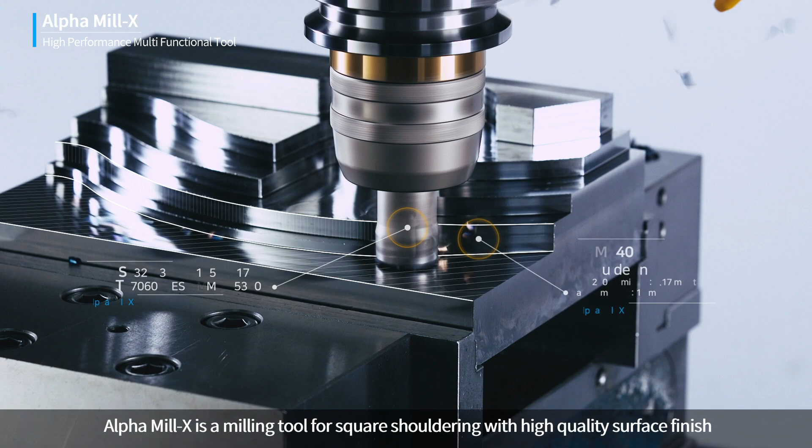A milling tool with high rake cutting edge for square shouldering, Alpha Mill X. Alpha Mill X is a milling tool for square shouldering with high quality surface finish, applying a high rake cutting edge and high rigidity design.

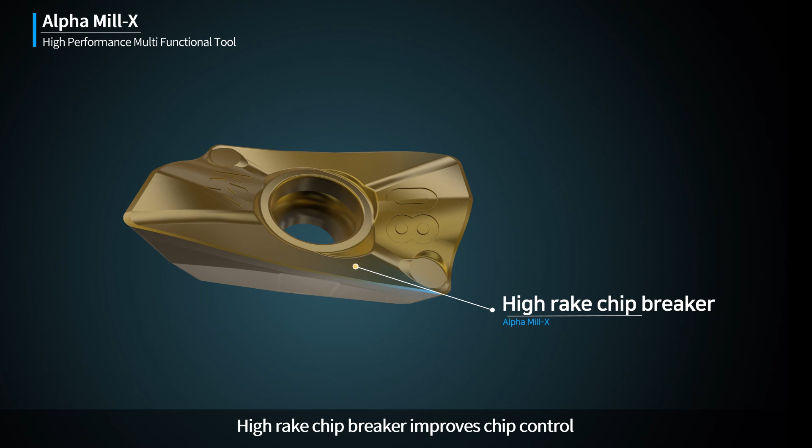High rake chip breaker improves chip control, and high helix cutting edge decreases cutting resistance dramatically.

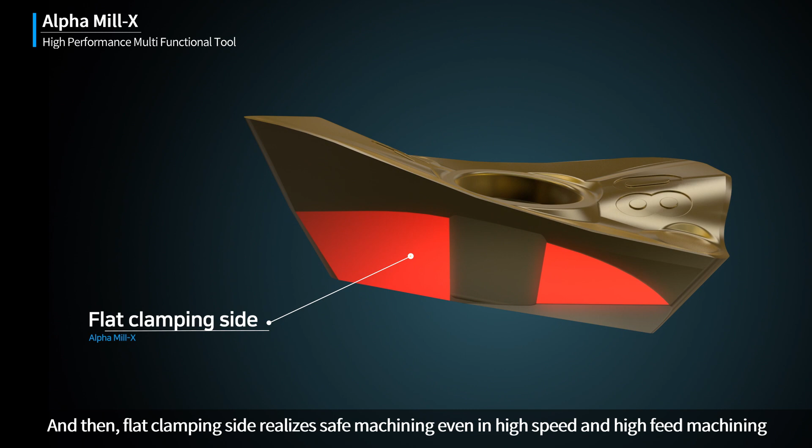Flat clamping side realizes safe machining even in high speed and high feed machining. Wide minor cutting edge is optimized for high surface finish machining.

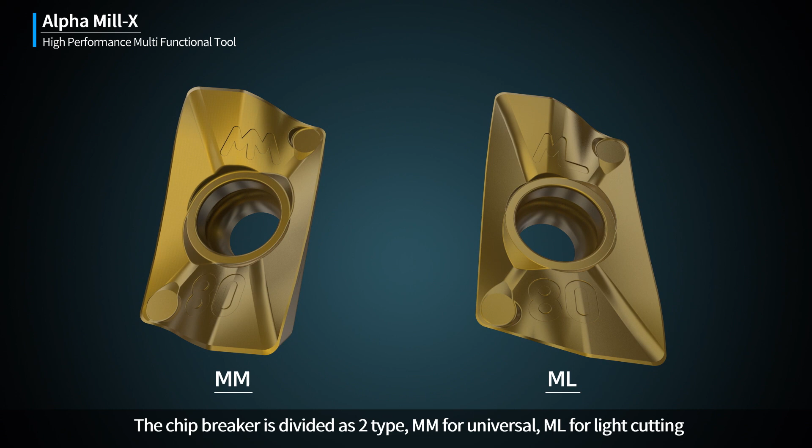The chip breaker is divided into two types: MM for universal, ML for light cutting. In addition, various nose radiuses meet customers' different needs.

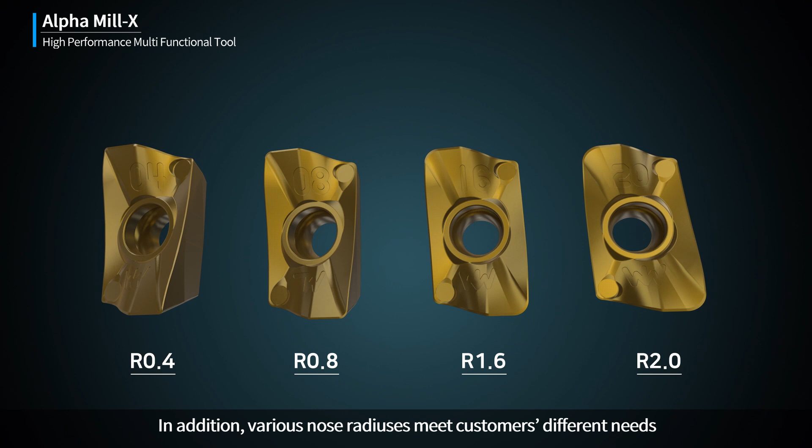Alpha Mill X, applying high rake cutting edge, decreases cutting load, and makes it possible to realize high-quality rectangular machining by achieving precise right angles through edge design optimized for rectangular machining.

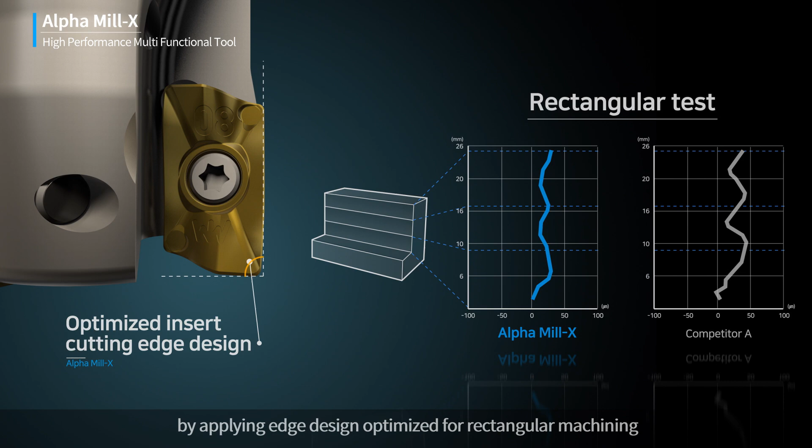Wide chip pocket and internal coolant system increase chip removal and machinability. The holder body of Alpha Mill X has two types: shank and cutter.

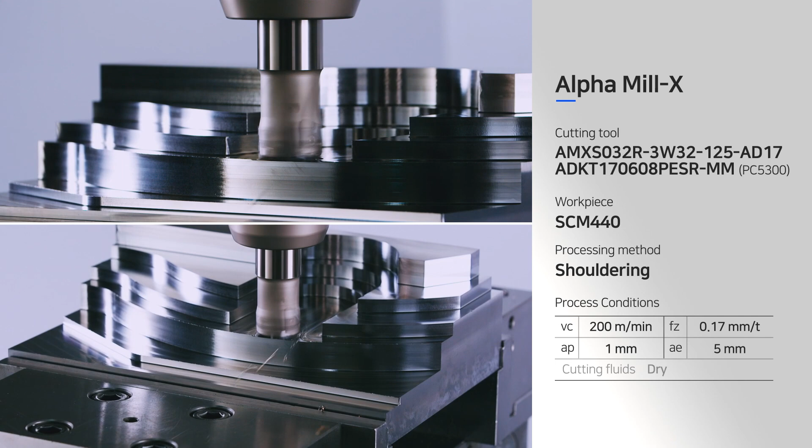A milling tool with high rake cutting edge for square shouldering, Alpha Mill X.